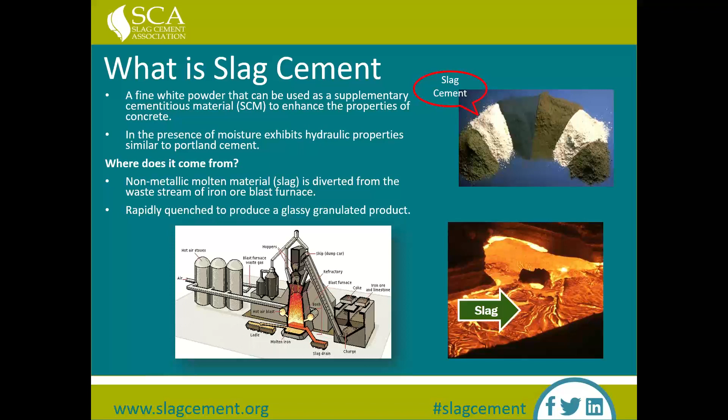Once that happens, these granules are ground to a suitable fineness. Your question might be, what is a suitable fineness? It's typically finer than Portland cement. To give you an idea of that, a pound of Portland cement can have 150 billion grains, so incredibly fine. Once this finished product is produced, it's used in concrete mixtures to enhance durability and sustainability. Looking at the pictures from left to right, on the left are the slag granules themselves after the cooling process. The picture in the center is a microscopic view of slag cement, the finished product after grinding. And the picture on the right is a slag cement grinding facility. Next slide.

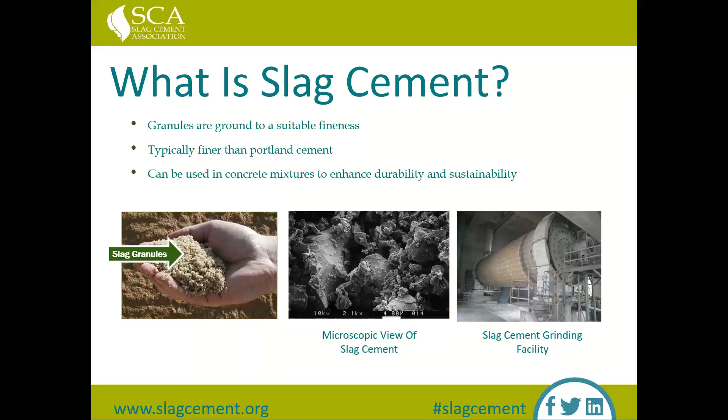So a lot of things going on in this slide. We're talking here about slag cement reaction. There are two concrete systems represented here. On the left, you've got a Portland cement concrete system. On the right, you've got a Portland and slag cement concrete system.

As you're looking at this, the gray represents your cement particles. The yellowish tannish material is calcium silicate hydrate, or CSH, which is the primary product from Portland cement and water hydration. It's also the glue, kind of responsible for the strength. The white areas in between are voids, and there is some calcium hydroxide or free lime in those areas.

On the right, as you're looking at the Portland slag cement concrete system, you'll notice there are fewer hydrated cement particles, fewer voids, and more of the CSH present. There are a couple different benefits you're getting from the slag in this situation: one is physical and the other is chemical.

From a physical standpoint, you've got your particle size distribution, the shape of the particles, that sort of thing, and so you are getting some particle packing which helps to densify the product. Second, you are getting some benefit from reaction of the slag with the calcium hydroxide to produce more CSH, in this case more of the calcium silicate hydrate.

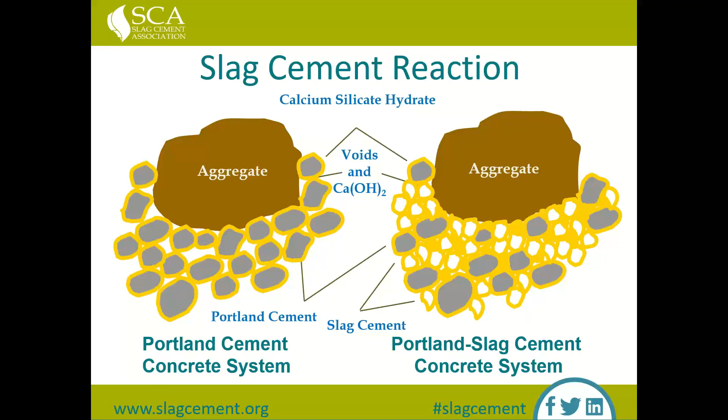So just a summary of slag and its properties and attributes: you're getting similar reactivity to ordinary Portland cement. There are differences in phases and mineralogy, but the reaction itself is similar. Typically, the replacement level of slag cement to Portland cement is 1-to-1. So if you hear us talk about a 50% slag mix, it's literally 50% of the Portland cement pulled out, replaced by 50% slag cement.

It's a hydraulic cement, so again, in the presence of moisture, it will hydrate. You will get strength gain and set.

It produces a stronger concrete, so it's denser, less permeable paste, again attributing to durability. You also get better slump retention, easier placing, consolidation, and finishing.

Typically with the slag cement mix, you're going to see lower early strengths than you are with ordinary Portland cement, but at least equal or higher 28-day compressive strengths typically. Several variables are involved in that process, but generally speaking, slag is going to perform better down the line, even extending this to 56 days or possibly even 90 days, depending on replacement levels.

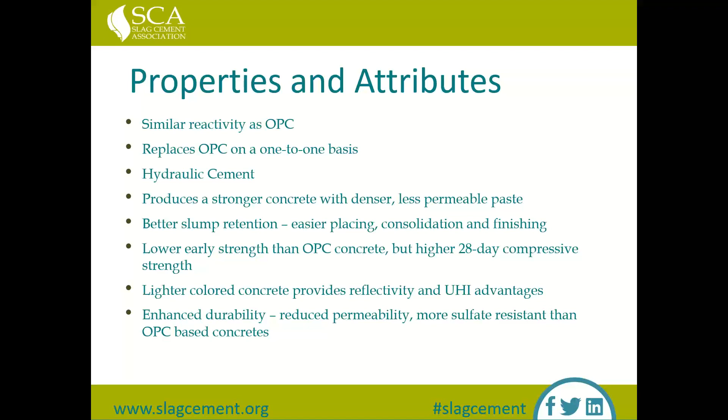So next we'll talk about ASR specifically. So what is alkali silica reaction, ASR? It's the chemical reaction between the alkalis in concrete, usually from the Portland cement, and certain types of silica reactive minerals that are in the aggregates.

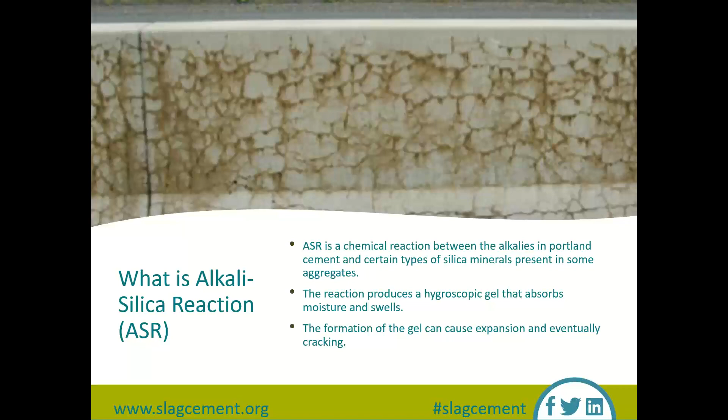So the alkalis are reacting with the aggregates, and this reaction produces a hygroscopic gel that absorbs moisture and swells. This swelling can cause expansion and eventually cracking in concrete. You can see an example in the picture, and that's obviously something we do not want in our concrete. Next slide, please.

Okay, so the factors that affect the rate and severity of ASR. Number one, I think the biggest factor is the reactivity of the aggregate. You can have different aggregates with different reactivity amounts. So that's the biggest factor when looking at ASR.

Also, you want to look at the availability of alkalis in the concrete. Again, for the most part, you're looking at the Portland cement, but there also might be external sources of alkalis, from de-icing salts or from ocean waters. You also want to look at the exposure conditions - the moisture availability and the temperature, and also the type of concrete element, its size and reinforcement.

You can also see the note at the bottom that ASR damage can work in concert with other types of damage. If you've got ASR damage to concrete, that might promote other types of damage, such as freeze thaw or corrosion, and the vice versa is also true. If you've got freeze thaw damage to concrete, and you've got cracks starting to form, that will accelerate any type of ASR damage.

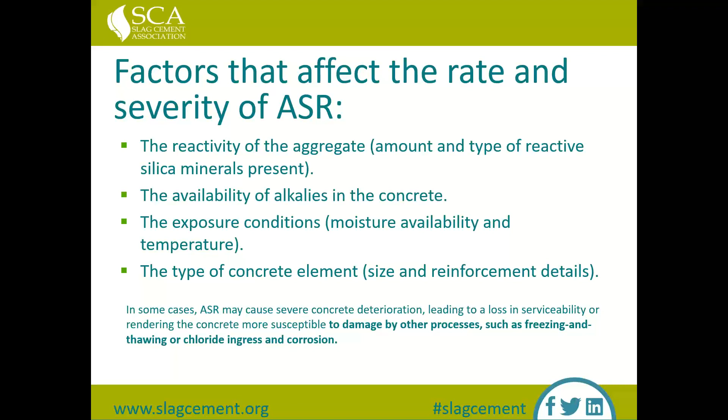Okay, so how does slag mitigate ASR? The following is from ACI 233R, and I first want to note that the effectiveness of slag cement in mitigating ASR was first reported in 1950. So this is something that's been known for a long time, that the use of slag can help mitigate ASR.

Next, we've got listed 5 factors of how slag helps to reduce ASR damage. The first one is the reduced permeability. I think that's a big factor with the durability benefits of all different types of attack associated with the use of slag. As Keith showed in the one diagram, the reduced permeability in systems containing both Portland and slag - you've got the smaller and less interconnected void structure leads to the reduced permeability that really helps with durability all around in concrete containing slag.

The next 3 factors listed have to do with alkali contents, both in the direct reduction of available alkalis in a concrete system, as well as a reduction in the alkali silica ratio in the concrete, and also the actual hydration of the slag itself consumes some of the alkalis. So when you've got slag in your system, it helps reduce the available alkalis that might contribute to ASR damage.

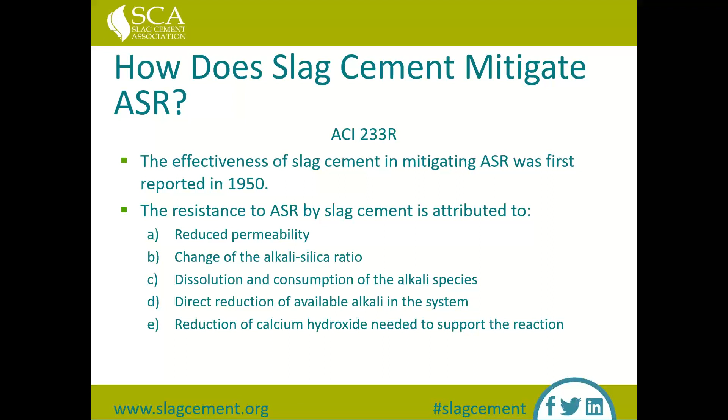And the last factor listed is a reduction in the calcium hydroxide, and the calcium hydroxide supports the ASR reaction, so it's helpful to reduce the calcium hydroxide. That's also a big part of the reduced permeability, is the reduced calcium hydroxide associated with systems with both Portland cement and slag.

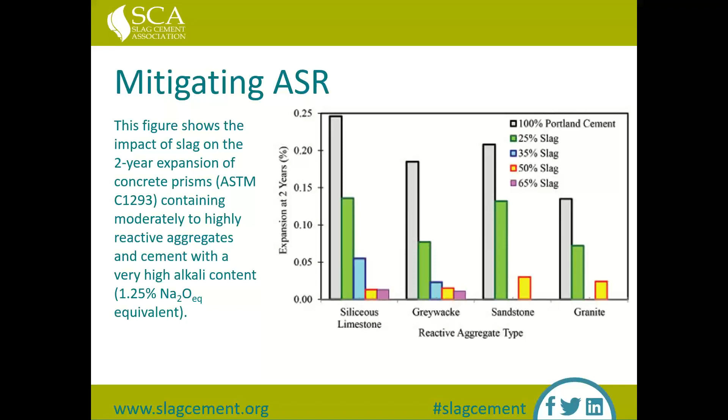Okay, so we know now what ASR is, and we know we don't want it. So what do we need to do about it? Once ASR begins, it's very difficult to stop it. You could try and stop it by eliminating water getting into the system, but it still can be very difficult. So really the most effective way for mitigating ASR is preventing it in the first place.

So the prevention involves looking at the proper materials needed in the concrete mix design when the concrete's first being placed. And you can see 3 factors we want to look at: limiting the alkali content in the concrete, limiting or prohibiting reactive aggregates, and specifying slag cement to prevent ASR. Now all 3 of those are encompassed into the guidance in the documents ASTM C1778 and AASHTO R80. Those documents give comprehensive guidance on mitigating ASR, and those will be the next dozen slides I will go over, regarding the guidance in those 2 documents.

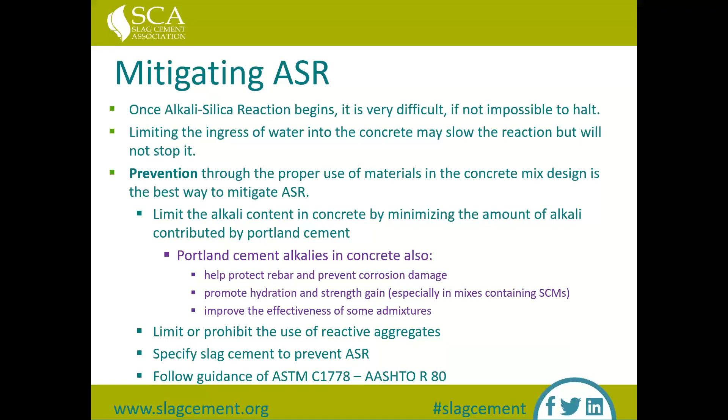But before we get there, with regard to limiting the alkali content in concrete, I wanted to note that while Portland cement alkalis can lead to ASR, they also have positive impacts on concrete. Portland cement alkalis can also help protect rebar and prevent corrosion damage. They help promote hydration and strength gain, especially in mixes containing SCMs such as slag. And they also can improve the effectiveness of some admixtures. So just wanted to note that there are some positives and negatives to Portland cement alkalis in concrete.

All right, next slide please. Okay, ASTM C1778 and AASHTO R80 - these are 2 documents that provide comprehensive guidance on ASR mitigation.

AASHTO R80 started as PP65. It was a provisional standard adopted by AASHTO in 2010. It's now a full standard as R80. I believe the current version has a 2017 date.

Similarly, ASTM C1778 was adopted by ASTM in 2014. These two documents are very similar and provide very similar recommendations. Many state DOTs have incorporated these approaches, this guidance, into their state specifications regarding ASR.

Pennsylvania, Maryland, Texas, and West Virginia all have ASR specifications similar to these documents, especially Pennsylvania, and what's being proposed for West Virginia - just a draft spec at the time, but looks like it'll be very similar to the guidance provided in these specifications. These specifications provide two performance options and three prescriptive options for how one would go about mitigating ASR. I want to note here that all of these options can utilize slag to help mitigate ASR.

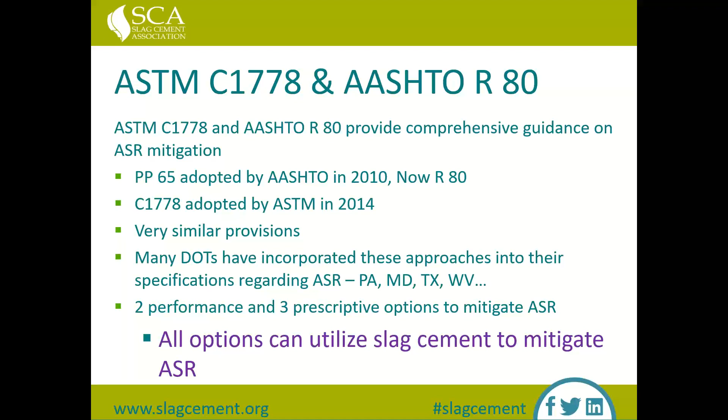Also, they might involve looking at the petrography of the aggregates. Two of the biggest test methods they're looking at are ASTM C1260 and ASTM C1293.

C1260, or the accelerated mortar bar test, is a 16-day test. The bars are in solution for 14 days, but the 1293 test is a year-long test. That's the preferred test, but obviously it takes much longer to get your result with a year, though it's recognized as providing a more accurate result. So again, the 1293 is the preferred test, but the 1260 is the alternative.

So, as a result of this classification of the aggregates, we've got three possible outcomes. The first being the aggregates are non-reactive. That's great - we can stop worrying about ASR in this particular concrete. If your aggregates are non-reactive, you don't need to pay attention to ASR any further.

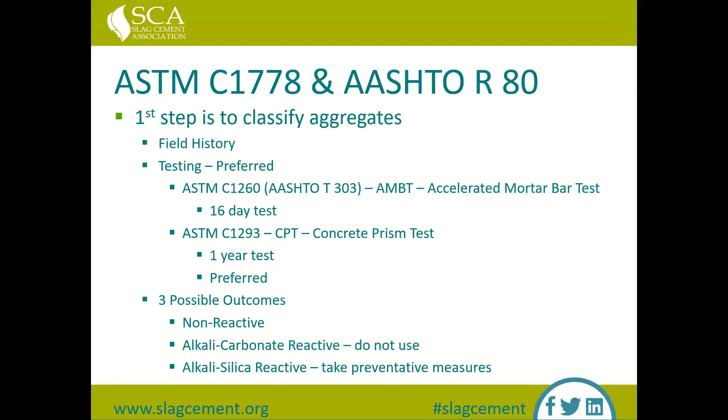Okay, we said there's two possible performance approaches. The first one being the C1293 test, the second being the C1567 test. Both of these approaches use a testing procedure to evaluate if a particular aggregate can be properly mitigated with a certain SCM replacement level - in this case, slag cement.

So you'll test your aggregate with a particular slag, usually with different replacement levels for both of these tests, and find a replacement level that properly mitigates ASR. Again, the 1293 test this time we're going to 2 years, not even just 1 year, but looking for a 2-year result. And similar to C1260, the 1567 is a 16-day test.

So if the 1293 2-year result is not greater than 0.04%, then your slag replacement level has been shown to properly mitigate for ASR. Similarly with C1567, if your test result is not greater than 0.1%, then the SCM, the slag replacement level, has been shown to properly mitigate for ASR.

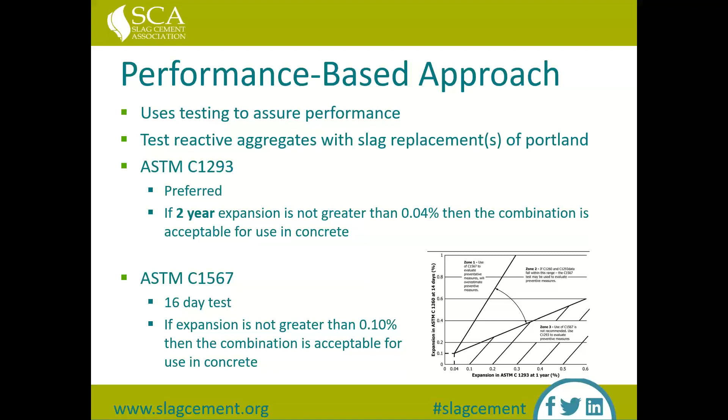Okay, now from the performance approach onto the prescriptive approach. The first step will be to determine the level of prevention needed, and the level starts with Level V - that's the lowest level - up to the highest level, Level double Z.

Then there's two or three options for the prescriptive approach. The first being the alkali loading. The second option being using a prescriptive SCM replacement amount. And the third option is just a combination of the first two options - so you're both looking at alkali loading as well as a set amount of SCM, in this case slag.

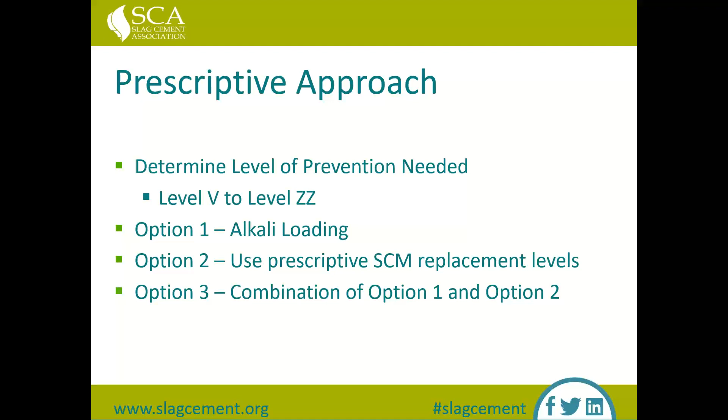All right, the first step of determining your level of prevention needed, we're back to our C1293 and C1260 results. But this time, instead of just seeing if the aggregate is reactive or not, we're putting it into a classification. You can see on the left-hand column is the aggregate reactivity class. Your R0 is your non-reactive, up to R3, which is very highly reactive. And again, we've got the 1-year 1293 test and the 14-day or 16-day total C1260 test.

Now, if you've got 1260 results and 1293 results, it's the 1-year C1293 concrete prism test that would override the 1260 test. You'd want to use that 1-year CPT test. So for example, if you've got a C1293 result of 0.07% at 1 year, that places you at an R1 aggregate reactivity class, which would be moderately reactive.

Be important to know here that you want to look at both your fine aggregate and your coarse aggregate or aggregates. If you've got, say for example, an R0 fine aggregate and an R1 coarse aggregate, you'd want to use whichever aggregate has the higher reactivity class and mitigate to that level. So in that case, you'd want to mitigate to the R1 aggregate reactivity class.

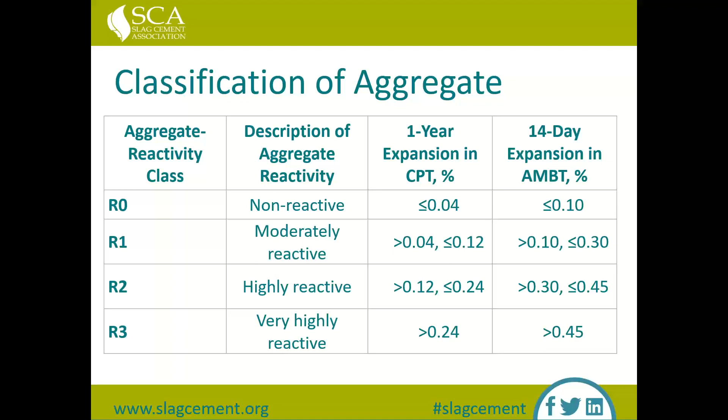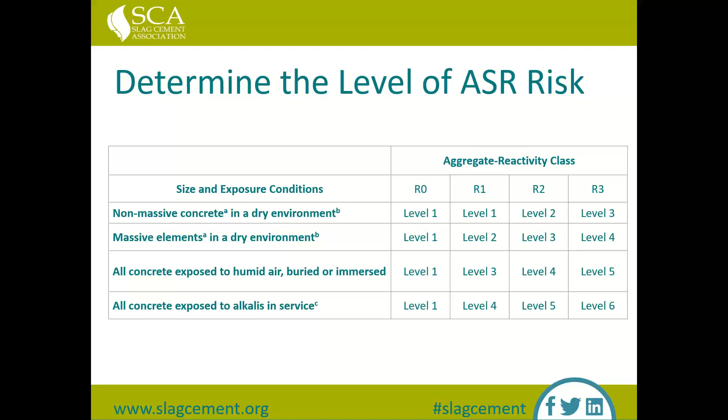Okay, now our next step is the structure classification. And this classification comes from the consequences of ASR and the acceptability of ASR, and goes from an S1 to an S4 class, with an S1 being that some deterioration may be tolerated, up to an S4 where ASR cannot be tolerated. The documents give different examples for each class.

For example, an S1 might be a temporary structure. An S2, you'd be looking at your sidewalks, curbs, and gutters. An S3 would be pavements and rural bridges. Up to an S4, again the most severe classification, being your major bridges and tunnels, where you're expecting a service life over 75 years, a 100-year service life. So your most severe structures.

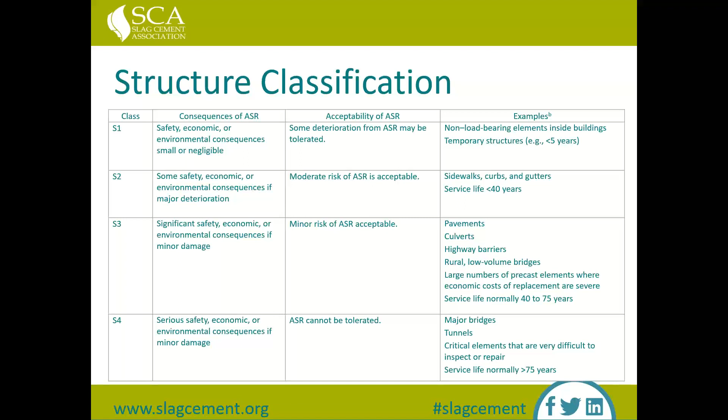All right, next slide, please.

All right, so this is where we get our level of prevention that I talked about. We've done all this to get this level of prevention. So we take the level of risk that we previously found and compared that to the classification of the structure to get this level of prevention. And this level of prevention is what will guide our level of mitigation that we'll see in the rest of the prescriptive options.

So for example, if we have an S2 structure and a risk level 4, that takes us to level X, level of prevention. All right, next slide, please.

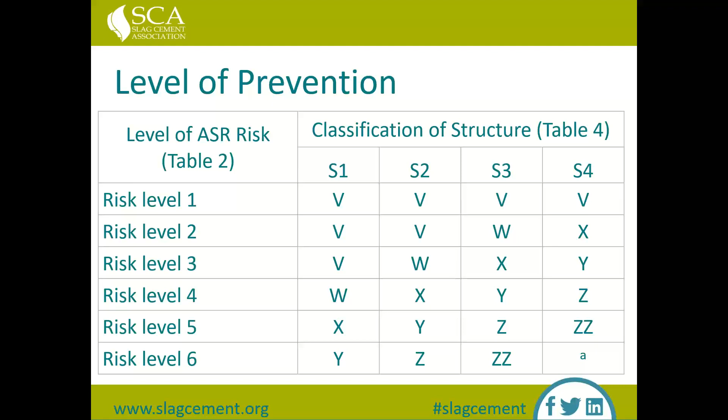Now again, the first prescriptive option for mitigating ASR is our alkali loading. There we can see with the different prevention levels, we've got different maximum alkali loading of concrete: prevention level V having no limit, prevention level W being 5 pounds per cubic yard of alkalis, down to prevention level Y being a maximum of 3 pounds per cubic yard of alkalis. And we'll look at Z and double Z a little bit later.

All right, next slide, please.

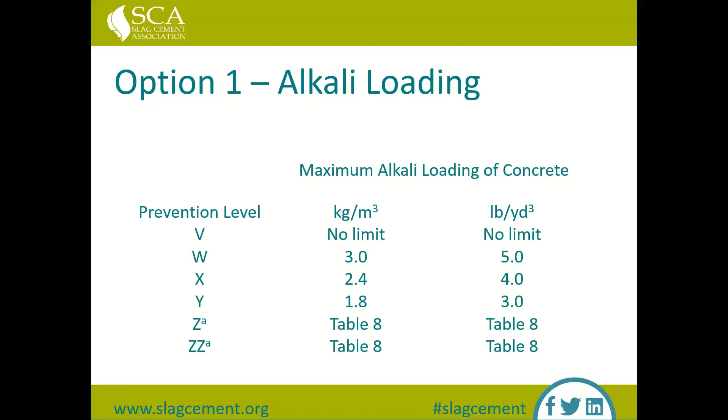All right, so how do we calculate the alkali loading? It's a simple calculation: you multiply the Portland cement content of your mix times the Portland cement alkali content, divided by 100. For example, if we've got a concrete that contains 600 pounds per cubic yard of Portland cement and the equivalent alkalis—that's the sodium and potassium combination of your Portland cement—is 0.8%, just multiply 600 times 0.8 divided by 100, gives you 4.8 pounds per cubic yard. Comparing that to the previous slide, that puts you at prevention level W, since we have not exceeded 5 pounds per cubic yard.

Now for example 2, we'll take the same 600 pounds total cementitious, the same 0.8% alkalis in our Portland cement, but this time we'll use 40% slag replacement. So that's 360 pounds per cubic yard of Portland and 240 pounds per cubic yard of slag. So again, the calculation is 360 times 0.8 divided by 100 equals 2.9 pounds per cubic yard. 2.9, we're less than 3, so that puts us at prevention level Y, which is a very high prevention level—a very strong mitigation level, being under 3 pounds per cubic yard of alkalis. One thing to note here is that we are not using the alkali content of the slag cement itself, as we mentioned earlier, because the alkalis are actually consumed by the slag hydration.

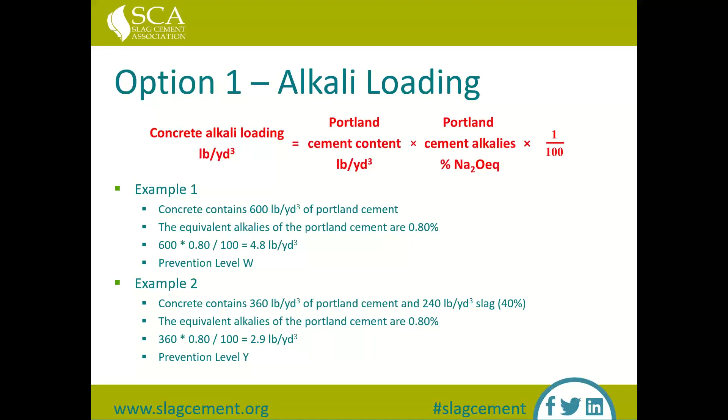So the alkalis are not available for ASR mitigation, not nearly as much as the Portland cement alkalis are. So it's only the Portland cement alkalis that are used in this alkali loading calculation. All right, next slide, please, Drew.

Now this takes us to the second option, which is using an SCM. You could use fly ash or silica fume also, but we're here to talk about slag today. So we just listed the slag option for mitigating ASR. What you'll want to look at is that top table there. Say if we need to meet prevention level X, that shows 35% slag replacement. Now that 35% is based off of Portland cement alkali content that is greater than 0.7 and less than 1%. That's where you use that 35%.

Now you alter that top chart by the bottom chart, depending on the alkali content of your Portland cement. For example, if you're using a Portland cement with an alkali content of 0.55%, you reduce the level by 1 prevention level - you move 1 column to the left. So if you need to mitigate to level X and you're using that 0.55% alkali Portland cement, you move one column to the left, so you only need a 25% replacement level in your mix.

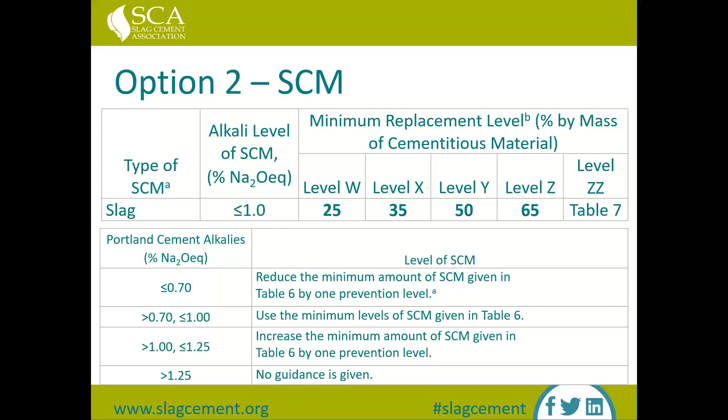All right, next slide please. This takes us to option 3, where you're looking at both alkali loading and using a prescriptive SCM amount. Again, this is only recommended for the highest prevention levels, Z and double Z. If you're looking at prevention level Z, for example, it lists the alkali loading of 3 pounds per cubic yard - that's the maximum for level Y, and also the SCM replacement level for level Y. Alternatively, if you're just using the SCM replacement level, you want to use the level Z column. However, for this recommendation, if you're using both, you use both at the level Y recommendation.

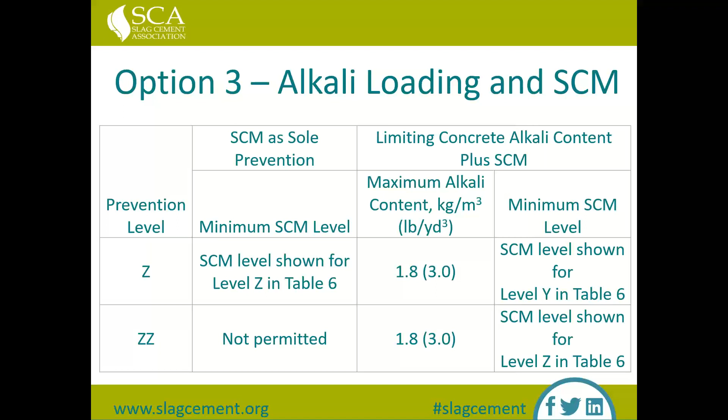And that's it on 1778 and R80, and I'll now move to Keith.

Great, thank you Clay. So I've pulled a few projects here we're going to take a look at, and the first couple come from Drew's library, actually. This was an award winner back in 2018, in the category of durability. This is the Indian Lake Spillway in Russell's Point, Ohio. Next slide, Drew.

So this is the second largest labyrinth-style dam in the United States and the largest east of the Mississippi River. Now if you're anal like me, that just raises the question, well what's the first? It's the Ute Dam in Logan, New Mexico. So there's a little piece of trivia to go with it.

Standing over 16 feet high and 700 feet long, with storage capacity at principal elevation of 15 billion gallons of water spanning over 5,000 acres. There was 7,300 yards of mass concrete used on this project. The producer was Ohio Ready Mix.

And the designs they used in this had a 50% slag substitution, and this was for 3 reasons: the first was temperature control for the mass concrete, ASR mitigation, and then also to help reduce shrinkage. So it had a very low water cement ratio and utilized a high range water reducer.

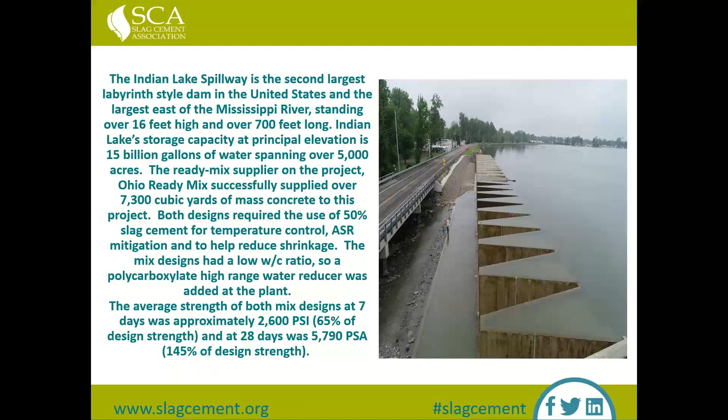So this was a 4,000 PSI design for 28 days. They were getting average strengths at 7 days with this 50% replacement level of 2,600 PSI, and then more than doubling that at 28 days. So they were well in excess of the 4,000 PSI design strength on this one. Next slide.

So aesthetically, you can see it's a pretty cool looking project, very attractive to tourists and people driving by, not only because of the design of the structure, but also, again, lighter concrete and bright white walls. The finishability for this particular one, the contractor said, was great, and the overall design strength well exceeded what the engineers were expecting.

So the owner on this one was Ohio Department of Natural Resources, Stantec Engineering, CJ Mahan, Ohio Ready Mix Incorporated, and then the slag cement was supplied by St. Marys. Okay, next slide.

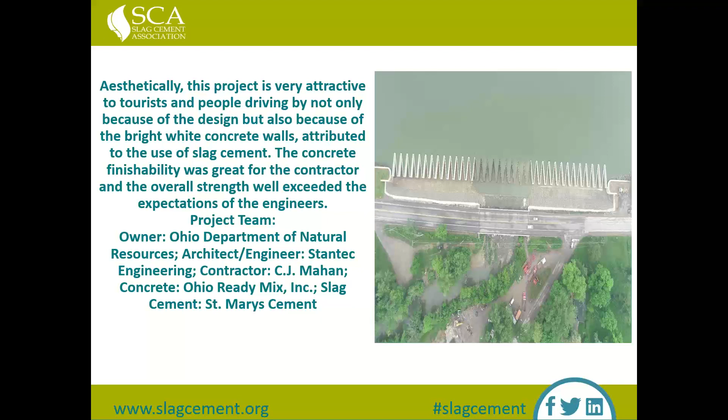This one was also a 2018 winner in the category of innovative applications. This is the Meadow Lake Wind Farm in Remington, Indiana. This was phase 6 of the project and consisted of the construction of 61 wind turbines, chosen for this area because of its proven wind resource. The project included not only the 61 wind turbines, but also transmission lines and a new substation.

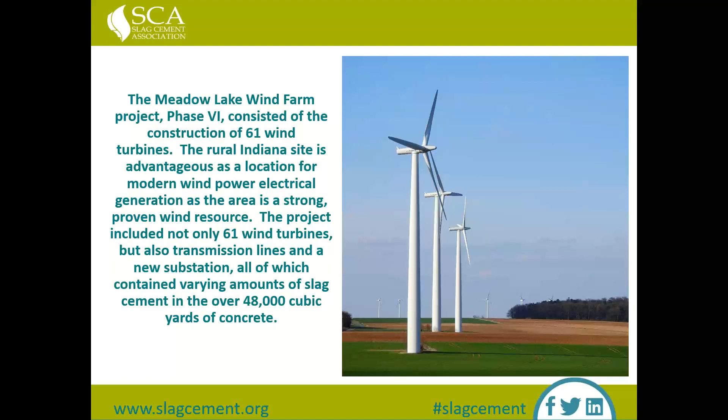All the concrete in this project contained slag in various amounts, and there's about 48,000 cubic yards of concrete in this particular project.

They wanted to expedite the process on this job, so the concrete was actually required to obtain 60% of compressive strength in 48 hours for stripping purposes, and still had to meet the 28-day requirement. There were some design challenges because of the typically lower early strengths of slag, but in this case they were able to affect that change within the design structure and hit those requirements.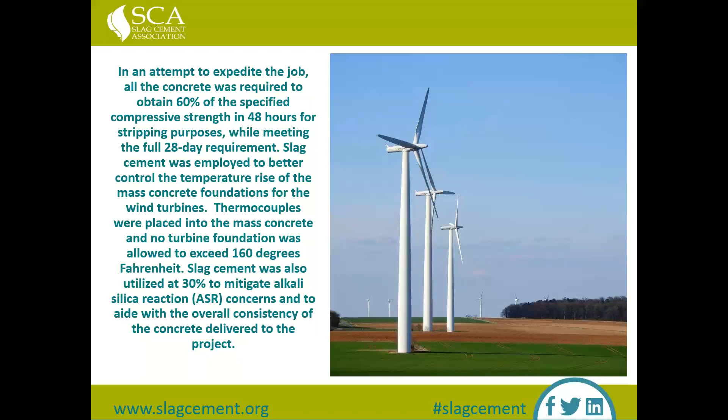The slag was employed to better control the temperature rise of mass concrete for the foundations. They placed thermocouples into the mass concrete and made sure no foundation exceeded 160 degrees Fahrenheit. They also used slag cement at a 30% substitution rate to mitigate alkali silica reaction and to aid with the overall consistency of the concrete used on this project.

A couple of fun facts: the anticipated output is a little over 200 megawatts, with a total capacity of a little over 600, which is enough to power roughly 157,000 average Indiana homes. Obviously, the environmental upside here is tremendous.

The project team on this one included EDP Renewables North America, Mortensen Construction, Barr Engineering, Irving Materials Incorporated, and the slag in this particular case was supplied by Lafarge Holcim.

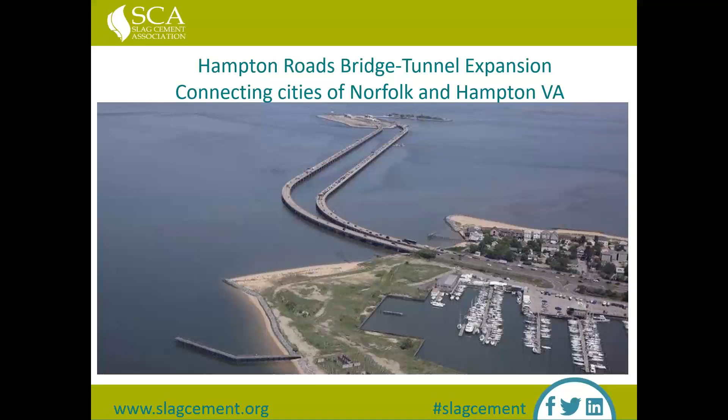This next one is an actual ongoing project here in my area. I'm in the Norfolk, Virginia Beach area of Virginia, and this is the Hampton Roads Bridge Tunnel expansion. This project connects the cities of Norfolk and Hampton, Virginia. The picture you're looking at currently is the Norfolk side, the Norfolk waterline. As you can see, there's a two-lane span heading each direction - east and west spans, a total of 4 lanes connecting these two cities.

This is a huge project - approximately 580,000 cubic yards of concrete in this particular portion of it. On a project of this size with these kinds of structures, there were enormous considerations for what testing had to take place and what went into deciding on materials and mix designs. They had to account for mass concrete temperatures, ASR, shrinkage, permeability, freeze-thaw durability, strength, and chloride ion concentration, just to name a few.

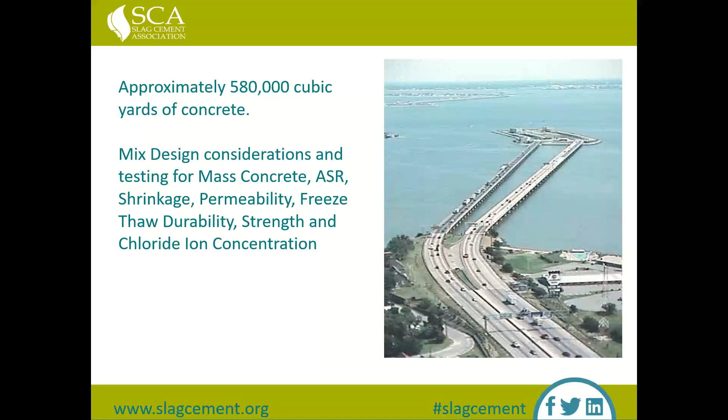Looking at these 4 lanes connecting the two cities, to give you an idea of the traffic impact, during summer peak hours they can have as many as 100,000 vehicles in a 24-hour period. The capacity of those 4 lanes right now is approximately 4,700 cars per hour. If you do the math, you can see there's really never a time in peak hours where there's not traffic, and it's quite often you can be caught in 5, 6, 7 miles of traffic leading up to this bottleneck.

The changes proposed are just to the west of these 4 lanes - there's going to be 4 more lanes constructed. So the 4 lanes currently in use will become the westbound traffic heading from Norfolk to Hampton, and the new proposed 4 lanes will bring eastbound traffic from Hampton to Norfolk. In addition, the areas on Interstate 64 leading to the bridge tunnel from either side will be expanded from 4 lanes to 6 lanes with a drivable shoulder.

The analysis basically says it will expand capacity from 4,700 cars per hour to 6,300, so you can see it'll be a significant reduction in that congestion, hopefully.

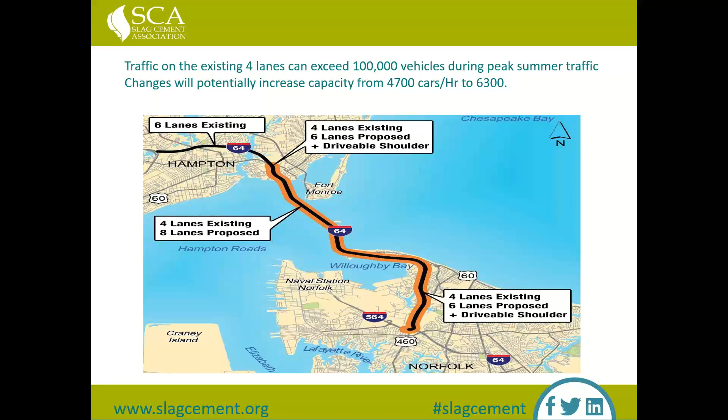To get into a few specifics on this one, the ASR specification on this project was a little different than what we've seen and what is suggested from C1778 and R80, as Clay explained them to you. The specification on this one actually requires an expansion of less than 0.08 at 28 days as determined by 1567. So going back to what Clay was bringing to you, the 1567 is from the performance-based side of that mitigation process.

The aggregates had to be submitted to be tested with the replacement level of slag cement they wanted to use. At the beginning stages, they ran ASTM C1260 on the two individual aggregates. Remember, the requirement from C1778 says less than 0.10, or a max of 0.10 at 16 days, is enough. This requirement was much more stringent than that. So those 1260 readings from the aggregates initially, the test was modified, taking it out to 28 days, with readings being 0.17% for the coarse and 0.10% for the fine aggregate, respectively. So they were both out of specification.

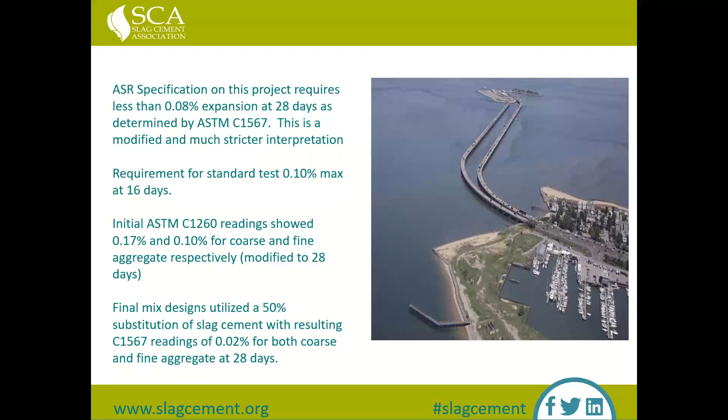This project is actually a design build and it's slated for completion in November of 2025. The construction team involved includes VDOT, the Hampton Roads Connector Partners, which includes several different companies - Dragados, Vinci, Flatiron, and Keller, just to name a few. The concrete producer is Commercial Ready Mix, coarse aggregate producer Vulcan Materials, and Argos USA. We are supplying the type 1-2 cement and the slag cement for this project.

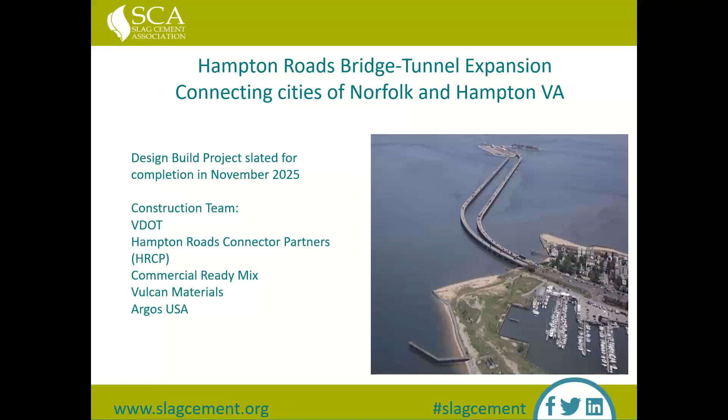And I think that concludes our presentation, Drew.

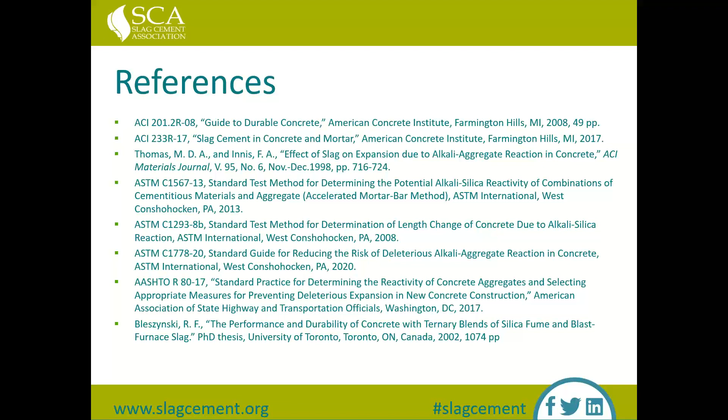Okay, Clay, do you want to take that one? I would think some, but very little. Everything in concrete is a trade-off. So if you've got a finer particle size, you would get more complete hydration. But on the flip side, if you're not adding more high range water reducer, then you would have a higher content of water needed into your mix. So that would kind of be on the opposite side - that would be hurting your ASR. Overall, I would say the size of the slag would have a very small impact. It's not something you really need to account for, and it's not something in the 1778 or R80 guidance.